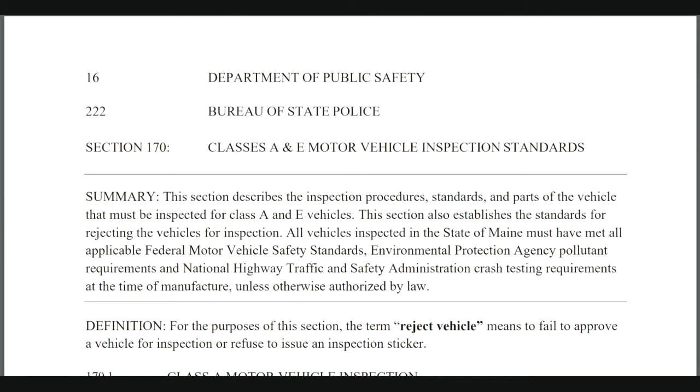Definition: For the purposes of this section, the term reject vehicle means to fail to approve a vehicle for inspection or refuse to issue an inspection sticker.

Class A Motor Vehicle Inspection. 1. Brakes. A. Procedure and Standard. 1. Hydraulic brake system. Depress the brake pedal using moderate foot force. There should be a minimum of approximately 1/3 of the available travel remaining. Moderate force is defined as 40 to 60 pounds in a non-power system and 15 to 20 pounds in a power assist system. Check power assist system with the engine running.

A. Reject vehicle if less than 1/3 of the total available pedal travel remains when the pedal is depressed under moderate foot pressure. B. Reject vehicle if pad is missing from the brake pedal.

2. Service brake and transmission test. Test the vehicle by driving it into the service area. Observe whether the vehicle comes to a smooth stop without pulling to the left or to the right. Test the vehicle's transmission, forward and reverse gears, as well as park position in automatic transmissions to ensure proper working order.

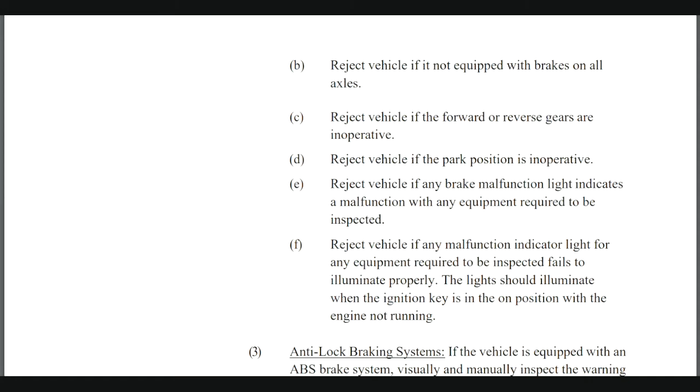3. Anti-lock braking systems. If the vehicle is equipped with an ABS braking system, visually and manually inspect the warning light. A. Reject vehicle if the warning light fails to illuminate during the cycle or self-check, or if the light remains on, or a self-diagnostic error is indicated. B. Reject vehicle if the ABS braking system is disconnected, disabled, or removed.

4. Parking brake performance. Set the parking brake firmly to determine the reserve travel of the hand, lever, or foot pedal. If the vehicle is equipped with a band-type parking brake, inspect the propeller shaft or drive shaft for the presence of oil or grease, and the condition of the lining and tightness.

A. Reject vehicle if the parking brake does not hold the vehicle upon testing. B. Reject vehicle if the method of applying the parking and service brakes are connected and constructed so that failure of one part leaves the vehicle without operative brakes. C. Reject vehicle if there is no reserve travel in the lever or pedal unless designed with no reserve by the manufacturer. D. Reject vehicle if there is oil or grease on the drum or lining.

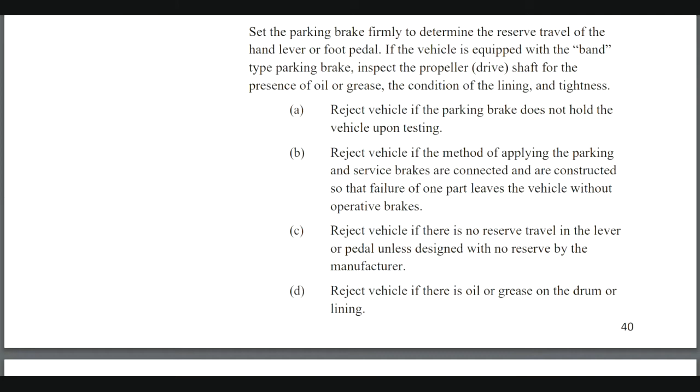E. Reject vehicle if lining is worn through the steel band. F. Reject vehicle if parking brake fails to properly disengage.

B. Inspection of braking mechanisms. 1. Brake linings and disc brake pads. If in the judgment of the inspection technician it is necessary, and with the customer's consent, the technician may remove at least one front wheel and one rear wheel and drum to further examine the brakes. A. Reject vehicle if, on a bonded lining, the thinnest point is less than 2/32 of an inch.

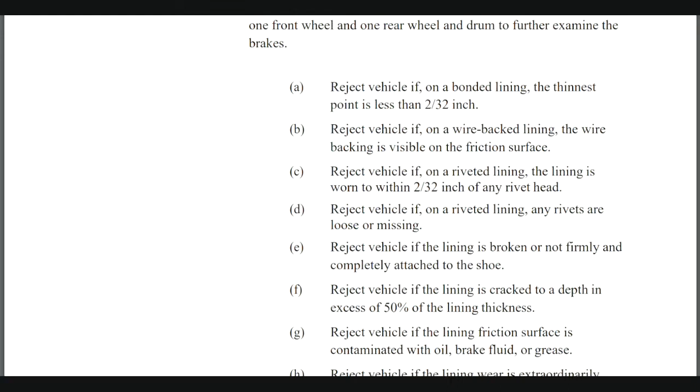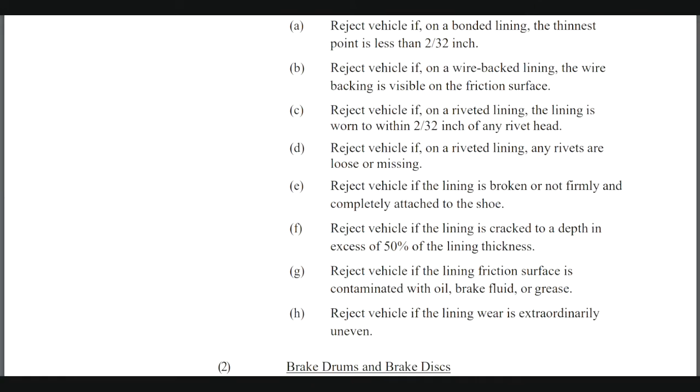Reject vehicle if, on a wire-backed lining, the wire backing is visible on the friction surface. Reject vehicle if, on a riveted lining, the lining is worn to within 2/32 of any rivet head, or if any rivets are loose or missing. Reject vehicle if the lining is broken or not firmly and completely attached to the shoe. Reject vehicle if the lining is cracked to a depth in excess of 50% of the lining's thickness. Reject vehicle if the lining friction surface is contaminated with oil, brake fluid, or grease. Reject vehicle if the lining wear is extraordinarily uneven.

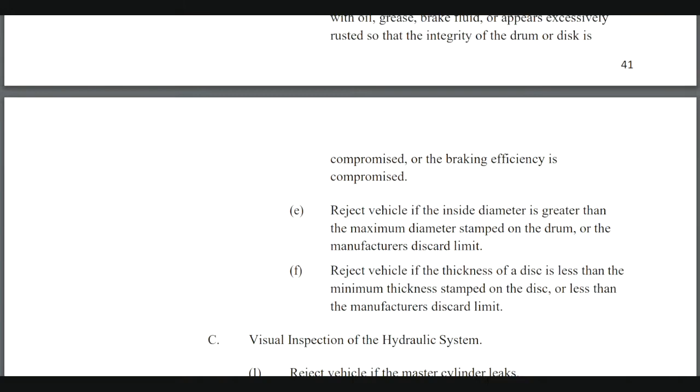Brake drums and brake discs. Reject vehicle if there are substantial cracks on the friction surface extending to the open edge, or if there are external cracks. Reject vehicle if there is evidence of mechanical damage other than wear. Reject vehicle if the friction surface is contaminated with oil, grease, brake fluid, or appears excessively rusted so that the integrity of the drum or disc is compromised or the braking efficiency is compromised. Reject vehicle if the inside diameter is greater than the maximum diameter stamped on the drum or the manufacturer's discard limit. Reject vehicle if the thickness of the disc is less than the minimum thickness stamped on the disc, or less than the manufacturer's discard limit.

Visual inspection of the hydraulic system. Reject vehicle if the master cylinder leaks, has pressure fade, or is less than half full or below the manufacturer's specifications. Reject vehicle if the gasket is torn or missing. Reject vehicle if the wheel cylinders leak. Reject vehicle if the hoses or tubings leak or are cracked, chafed, flattened, restricted, or are insecurely fastened. Reject vehicle if the brake tubing is rusted to a point of flaking, is bulging, pitting, or has welded sections. Surface rust is not a cause for rejection.

Reject vehicle if any replacement hydraulic brake lines are made with material other than automotive-rated tubing that meets SAE standards, or if the safety tubing is not joined with an SAE-approved hydraulic brake line fitting to ensure a leak-proof joint. Currently, there are no SAE-approved compression fittings for hydraulic brake lines.

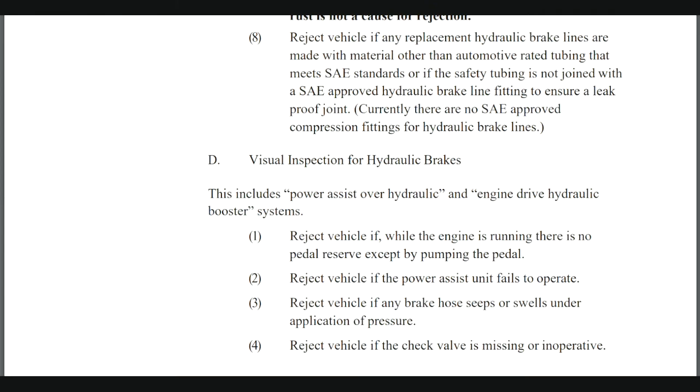Visual inspection for hydraulic brakes. This includes power assist over hydraulic and engine-drive hydraulic booster systems. Reject vehicle if, while the engine is running, there is no pedal reserve except by pumping the pedal. Reject vehicle if the power assist unit fails to operate. Reject vehicle if any brake hose seeps or swells under application of pressure. Reject vehicle if the check valve is missing or inoperative. Reject vehicle if there is any visually observed leaking hydraulic fluid in the brake system.

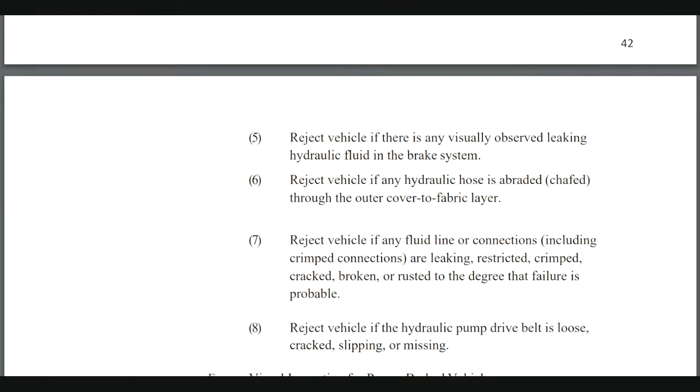Reject vehicle if any hydraulic hose is abraded, chafed, through the outer cover to fabric layer. Reject vehicle if any fluid line or connections, including crimped connections, are leaking, restricted, crimped, cracked, broken, or rusted to the degree that failure is probable. Reject vehicle if the hydraulic pump drive belt is loose, cracked, slipping, or missing.

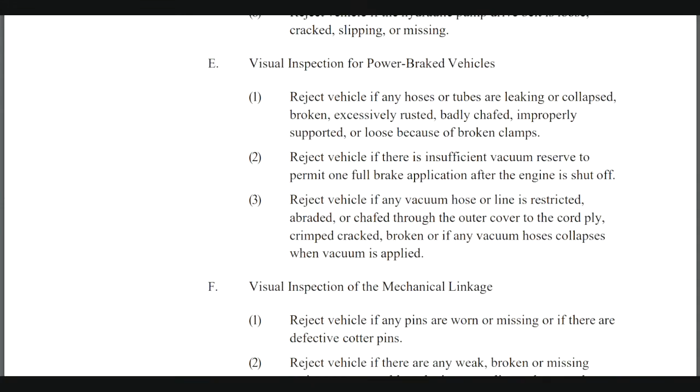Visual inspection for power braked vehicles. Reject vehicle if any hoses or tubes are leaking or collapsed, broken, excessively rusted, badly chafed, improperly supported, or loose because of broken clamps. Reject a vehicle if there is insufficient vacuum reserve to permit one full brake application after the engine is shut off. Reject a vehicle if any vacuum hose or line is restricted, abraded, or chafed through the outer cover to the cord ply, crimped, cracked, broken, or if any vacuum hoses collapse when vacuum is applied.

Visual inspection of the mechanical linkage. Reject vehicle if any pins are worn or missing, or if there are defective cotter pins. Reject vehicle if there is any weak, broken, or missing springs, or worn cables, clevises, coupling rods, or anchor pins. Reject vehicle if there are any frozen, rusted, or inoperative connections. Reject vehicle if the pedal shaft or any bearings are worn from high friction or are misaligned.

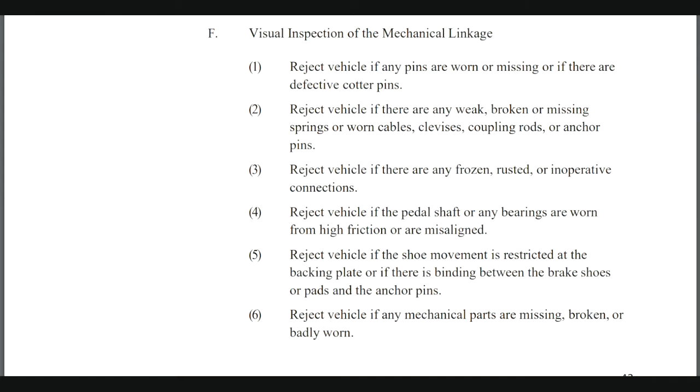Reject vehicle if the shoe movement is restricted at the backing plate or if there is binding between the brake shoes or pads and the anchor pins. Reject vehicle if any mechanical parts are missing, broken, or badly worn. Reject vehicle if there is high friction in pedal and linkage or in brake components. Reject vehicle if any brake operating levers are improperly positioned or misaligned. Reject vehicle if the brake pads are binding on the caliper brackets or if the brake slides are frozen.

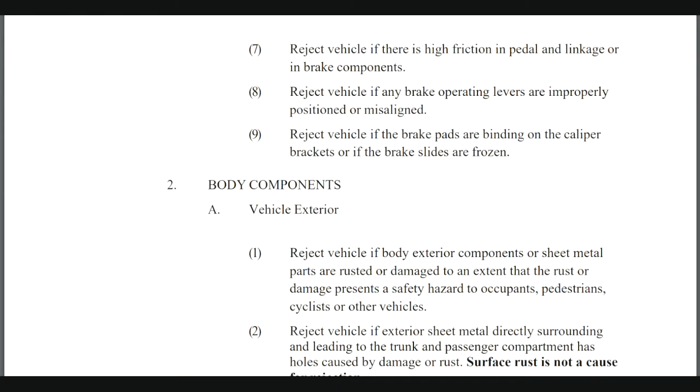Body components. Vehicle exterior. Reject vehicle if body exterior components or sheet metal parts are rusted or damaged to an extent that the rust or damage presents a safety hazard to occupants, pedestrians, cyclists, or other vehicles.

Reject vehicle if exterior sheet metal directly surrounding and leading to the trunk and passenger compartment has holes caused by damage or rust. Surface rust is not a cause for rejection. Reject vehicle if any required body exterior components, including the hood, fenders, quarter panels, doors, and side panels, are loose, missing, or not securely attached to the body as a result of damage, modification, or rust.

Reject vehicle if any door is missing, unless originally manufactured with removable doors, has inoperable latches, broken or missing parts, or otherwise fails to function properly. Rear door latches can be disabled on a police cruiser. A vehicle may have the door handles removed and the sheet metal and door opening mechanism modified to create a smooth appearance. There must, however, be a mechanical method of opening any door from inside the vehicle.

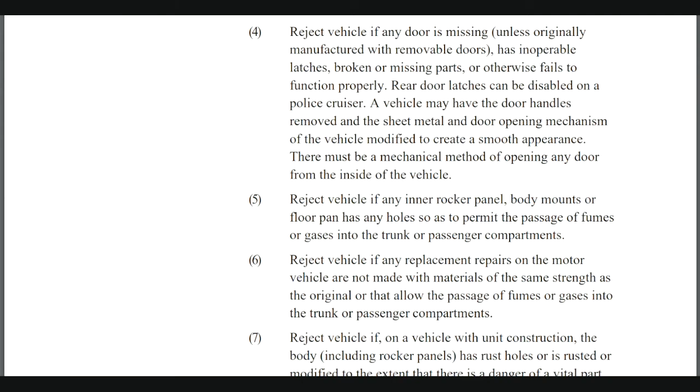Reject vehicle if any inner rocker panel, body mounts, or floor pan has any holes as to permit the passage of fumes or gases into the trunk or passenger compartments. Reject vehicle if any replacement repairs on the motor vehicle are not made with materials of the same strength as the original, or that allow passage of fumes or gases into the trunk or passenger compartments.

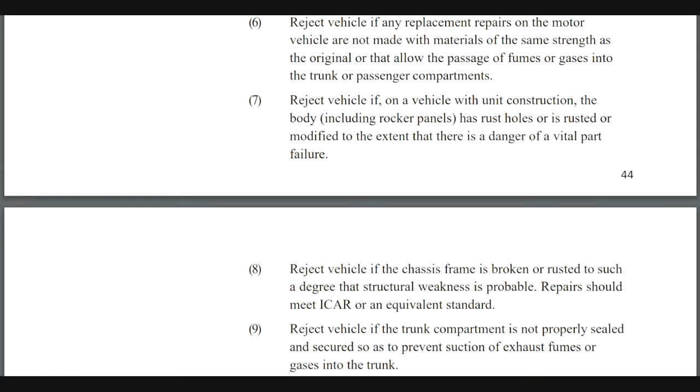Reject vehicle if on a vehicle with unit construction the body, including rocker panels, have rust holes or is rusted or modified to the extent that there is danger of a vital part failure. Reject vehicle if the chassis frame is broken or rusted to such a degree that structural weakness is probable. Repairs should meet ICAR or equivalent standard.

Reject vehicle if the trunk compartment is not properly sealed and secured so as to prevent suction of exhaust fumes or gases into the trunk. Reject vehicle if the hood latch mechanism fails to operate properly unless it is otherwise secured so it will not open accidentally. Section B: Fenders and bumper protection systems.

Reject vehicle if on a vehicle originally equipped with bumpers, any bumpers are missing or are not securely attached. Reject vehicle if any modification to or replacement of the vehicle's originally equipped bumper protection system is not of the same apparent strength or results in less protection. A bumper protection system may consist of structural and or cosmetic components, sheet metal or other material, designed to limit damage in a frontal or rear impact.

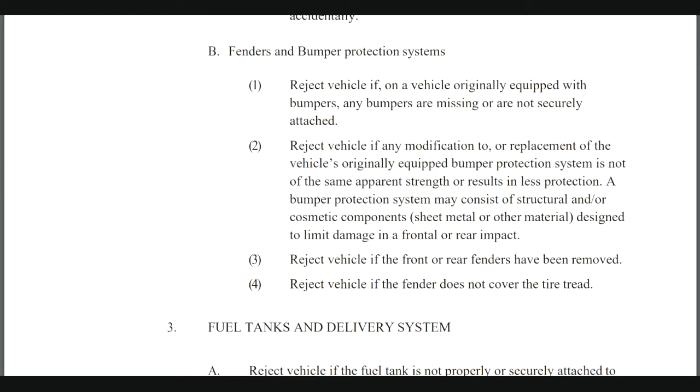Reject vehicle if the front or rear fenders have been removed. Reject vehicle if the fender does not cover the tire tread.

Section 3: Fuel tanks and delivery system. A: Reject vehicle if the fuel tank is not properly or securely attached to the vehicle body or chassis. B: Reject vehicle if the fuel cap is missing or broken. C: Reject vehicle if any fuel evaporation hose is broken or not connected. D: Reject vehicle if the fuel tank was not of a type originally manufactured for motor vehicles.

Aftermarket auxiliary fuel tanks and fuel cells are acceptable as long as they meet all other requirements of this section and any applicable federal or state law. E: Reject vehicle if there is any fuel or gas leak anywhere in the fuel delivery system. F: Reject vehicle if the fuel line is rusted to the point of flaking, bulging, or pitting, and failure is imminent.

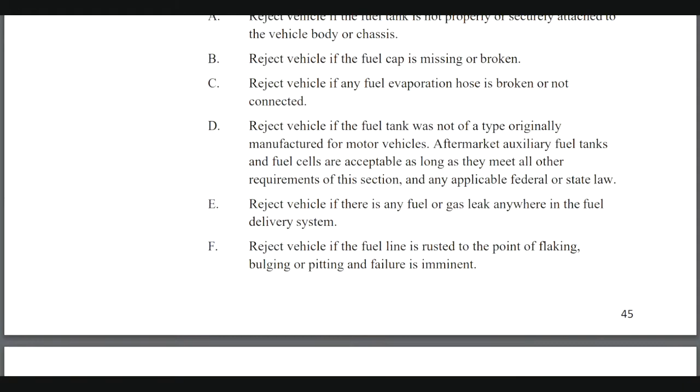G: Reject vehicle if the fuel tank or fuel tank filler vent or drain openings are not located outside the passenger or trunk areas. H: Reject vehicle if any replacement fuel lines are made with material other than automotive-rated tubing or braided hose for fuel line use. Note: fuel and evaporative lines may be repaired with SAE-approved compression fittings.

Section 4: Seats and passenger restraint systems. A: Reject vehicle if any seat is not properly and securely attached to the floor. B: Reject vehicle if any seat adjusting mechanism slips out of the set position or fails to function properly. C: Reject vehicle if any replacement seat was not originally designed for motor vehicles.

D: Reject vehicle if seat belts are not installed on 1966 and subsequent models, and retractable seat belts are not installed and functioning in 1980 and subsequent models. E: Reject vehicle if any seat belts are not completely functional or if they have cuts or excessive fraying.

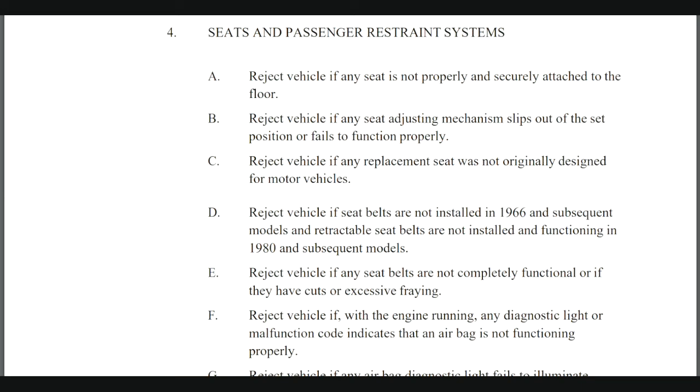F: Reject vehicle if, with the engine running, any diagnostic light or malfunction code indicates that an airbag is not functioning properly. G: Reject vehicle if any airbag diagnostic light fails to illuminate during the self-check. H: Reject vehicle if any deployed airbag has not been properly replaced with a functioning airbag system.

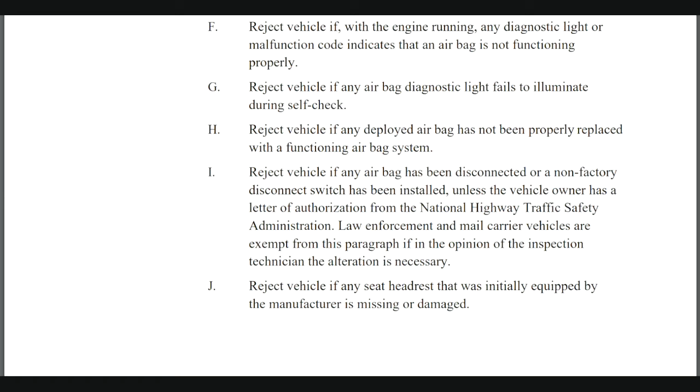I: Reject vehicle if any airbag has been disconnected or a non-factory disconnect switch has been installed, unless the vehicle owner has a letter of authorization from the National Highway Traffic Safety Administration. Law enforcement and mail carrier vehicles are exempt from this paragraph if, in the opinion of the inspection technician, the alteration was necessary. J: Reject vehicle if any seat headrest that was initially equipped by the manufacturer is missing or damaged.

5. Other vehicle components. A. Reject vehicle if automotive batteries are installed in the passenger compartment other than those originally installed by the manufacturer. B. Reject vehicle if the battery is not secured by a hold down. C. Reject vehicle if the battery tray is rusted to the point where it no longer securely supports the battery.

D. Reject vehicle if automotive batteries originally installed by the manufacturer in the passenger compartment are not secured and equipped with a protective covering to prevent injury to or contact with any person.

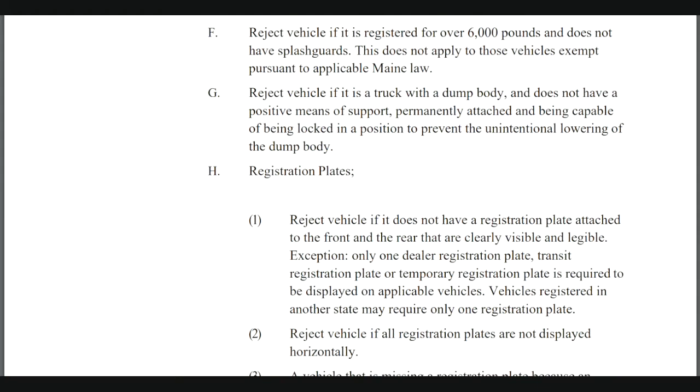E. Reject vehicle if it leaks petroleum fluids in an amount or in such a location as to constitute a fire hazard. F. Reject vehicle if it is registered for over 6,000 pounds and does not have splash guards. This does not apply to those vehicles exempt pursuant to applicable Maine law.

Reject vehicle if it is a truck with a dump body and does not have a positive means of support permanently attached and being capable of being locked in a position to prevent the unintentional lowering of the dump body.

H. Registration plates. 1. Reject vehicle if it does not have a registration plate attached to the front and the rear that are clearly visible and legible. Exception: only one dealer registration plate, transit registration plate, or temporary registration plate is required to be displayed on applicable vehicles. Vehicles registered in another state may require only one registration plate.

2. Reject vehicle if all registration plates are not displayed horizontally. 3. A vehicle that is missing a registration plate because an original was lost, mutilated, or illegible may be inspected if it has a temporary registration plate bearing the registration number that is displayed as nearly as possible in the position occupied by the original plate, and if the owner has a receipt from the Bureau of Motor Vehicles showing that a replacement registration plate has been ordered.

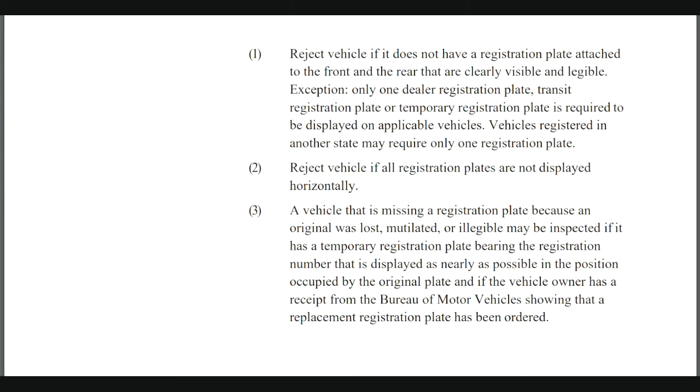6. Exhaust system. A. Exhaust system examination. 1. The exhaust system includes the exhaust manifolds, head pipes, catalytic converters, intermediate pipes, mufflers, and tailpipes.

2. The exhaust system shall be examined by listening for exhaust leaks and shall be examined visually after either the vehicle has been lifted on a hoist or has been jacked up sufficiently to allow a proper examination, or is over a pit. Rusted or corroded areas must be examined carefully.

B. Rejection standards. 1. Reject vehicle if there is any loose or leaking joints or seams in the exhaust system. 2. Reject vehicle if there are any holes in the exhaust system other than small holes obviously made by the manufacturer to provide drainage.

3. Reject vehicle if there are any loose interior baffles. 4. Reject vehicle if the exhaust system has been inadequately repaired. 5. Reject vehicle if any exhaust system elements are not fastened securely by use of hangers or clamps.

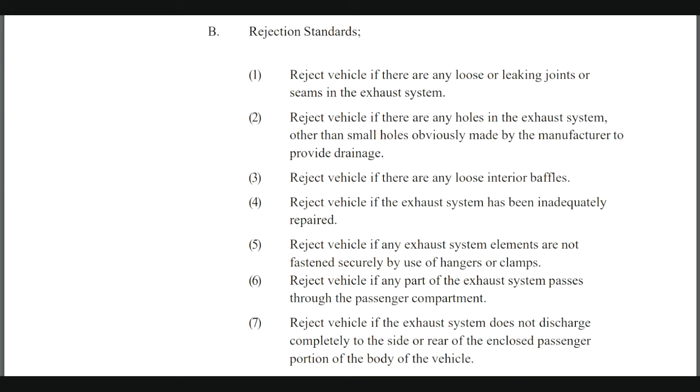6. Reject vehicle if any part of the exhaust system passes through the passenger compartment. 7. Reject vehicle if the exhaust system does not discharge completely to the side or rear of the enclosed passenger portion of the body of the vehicle.

8. Reject vehicle if it is not equipped with a muffler or mufflers that are effective at reducing noise. No muffler may be altered to amplify noise, and all mufflers must prevent excessive or unusual noise.

9. Reject vehicle if it was manufactured after the 1982 model year and it is not equipped with a catalytic converter, unless the vehicle was not originally equipped with a catalytic converter. Note: if the vehicle was originally equipped with a catalytic converter, it must have one to pass inspection, even if the vehicle was manufactured in 1982 or prior years.

10. Reject vehicle if the tailpipe extends more than 2 inches beyond the rearmost point of the vehicle or bumper, unless originally so equipped by the manufacturer. Note: Maine standards for new aftermarket catalytic converters, AMCC, began June 1st, 2018. See supplemental info.

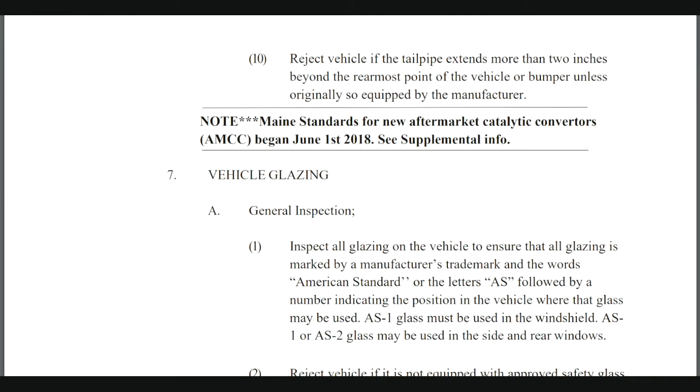7. Vehicle glazing. A. General inspection. 1. Inspect all glazing on the vehicle to ensure that all glazing is marked by a manufacturer's trademark and the words American Standard or the letters AS, followed by a number indicating the position in the vehicle where that glass may be used.

AS1 glass must be used in the windshield. AS1 or AS2 glass may be used in the side and rear windows. 2. Reject the vehicle if it is not equipped with approved safety glass, wherever glass is used in doors, windows, and windshields, if the vehicle was manufactured after December 31st, 1937.

3. Reject vehicle if cloudiness extends more than 1 inch from the top or sides or more than 4 inches from the bottom edge of the windshield and, in the opinion of the inspecting technician, obstructs the driver's clear view of the road.

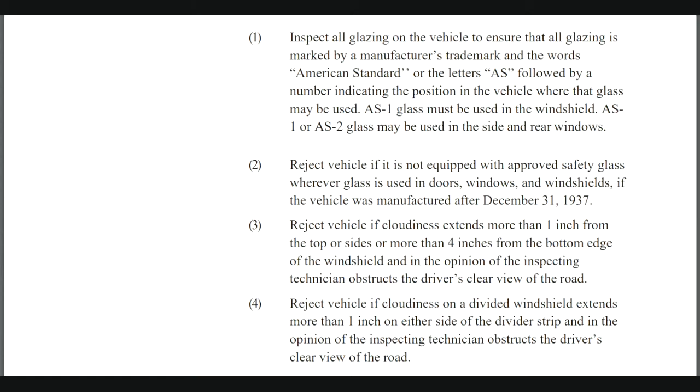4. Reject vehicle if cloudiness on a divided windshield extends more than 1 inch on either side of the divider strip, and in the opinion of the inspecting technician obstructs the driver's clear view of the road.

5. Reject vehicle if in the critical vision area of the windshield there are any unrepaired bullseye fractures, star fractures, stone bruises, cracks, or chips that measure more than 1 inch at the extreme edges, and, in the opinion of the inspecting technician, obstructs the driver's clear view of the road.

6. Reject vehicle if there is any crack more than 6 inches long within the critical vision area of the windshield. 7. Reject vehicle if there is a windshield wiper scratch, mar, or marks more than 4 inches long and 1/4 inch wide on the windshield,

and in the opinion of the inspecting technician, obstructs the driver's clear view of the road. 8. Reject vehicle if it was originally equipped with a windshield by the manufacturer and it does not have a windshield.

9. Reject vehicle if either the left or right front window mechanism is not in working order. 10. Reject vehicle if any glass is broken or shattered so as to obstruct the vision of the operator or endanger the occupants of the vehicle.

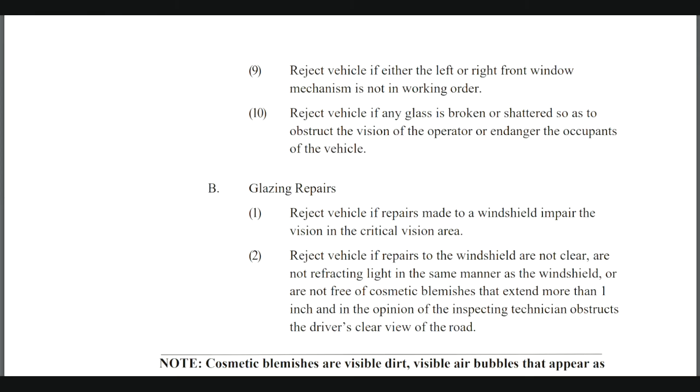B. Glazing repairs. 1. Reject vehicle if repairs made to a windshield impair the vision in the critical vision area. 2. Reject vehicle if repairs to the windshield are not refracting light in the same manner as the windshield, or are not free of cosmetic blemishes that extend more than 1 inch, and, in the opinion of the inspecting technician, obstructs the driver's clear view of the road.

Note: cosmetic blemishes are visible dirt, visible air bubbles that appear as silver or black spots, visible cracks with a discernible thickness that appear as black or silver lines, or cloudiness of the laminate.

C. Window tinting, treatments, or coverings. 1. Reject vehicle if there are any items other than items allowed by statute hanging on or in the windshield, front side windows, or rear window that obstruct or obscure the driver's view.

2. Reject vehicle if any window is composed of, covered with, or treated with any reflective material. 3. Reject vehicle if the windshield has any tint that is not part of a factory-installed original equipment windshield, installed in accordance with FMVSS, Section 205. A tinted sunshield strip that extends no more than 5 inches from the top of the windshield is permissible.

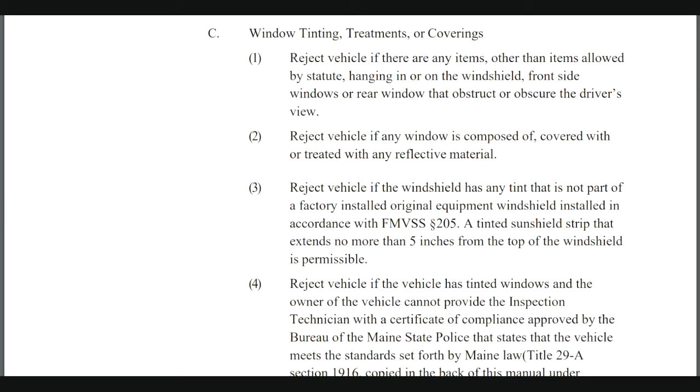4. If the vehicle has tinted windows and the owner of the vehicle cannot provide the inspection technician with a certificate of compliance approved by the Bureau of the Maine State Police that states that a vehicle meets the standards set forth by Maine law, Title 29-A, Section 1916, copied in the back of this manual under supplemental info, in this chapter for light transmittance.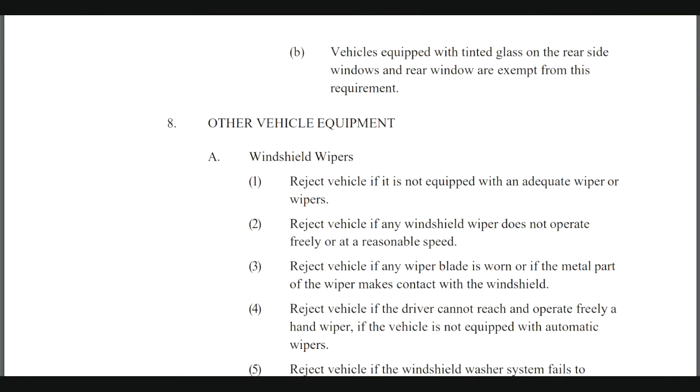A. Any window tinting treatment or covering must be removed if it fails to meet the inspection standard. B. Vehicles equipped with tinted glass on the rear side windows and rear window are exempt from this requirement.

8. Other vehicle equipment. A. Windshield wipers. 1. Reject vehicle if it is not equipped with an adequate wiper or wipers. 2. Reject vehicle if any windshield wiper does not operate freely or at a reasonable speed. 3. Reject vehicle if any wiper blade is worn or if the metal part of the wiper makes contact with the windshield.

4. Reject vehicle if the driver cannot reach and freely operate a hand wiper if the vehicle is not equipped with automatic wipers. 5. Reject vehicle if the windshield washer system fails to function as designed.

B. Rear view mirrors. 1. Reject vehicle if it does not have all the original factory installed rear view mirrors or their equivalent replacement. A vehicle with a dump body or similar obstruction, like an ambulance, cube van, etc., is not required to have an inside rear view mirror.

2. Reject vehicle if any mirror is not mounted securely to prevent its swinging or excessive vibration. 3. Reject vehicle if any mirror does not give the driver a view of the road 200 feet to the rear.

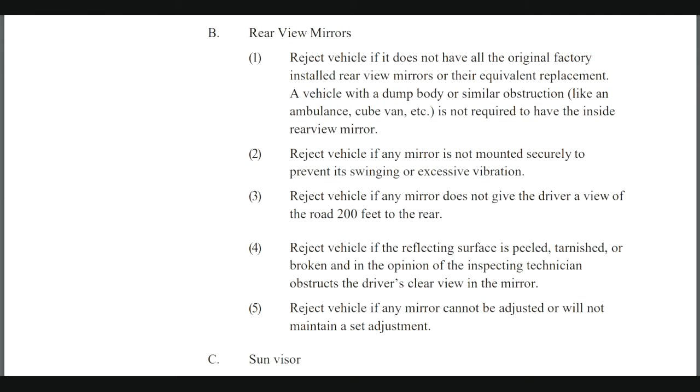Reject vehicle if the reflecting surface is peeled, tarnished, or broken and, in the opinion of the inspecting technician, obstructs the driver's clear view in the mirror. Reject vehicle if any mirror cannot be adjusted or will not maintain a set adjustment.

Sun visor: Reject vehicle if the sun visor cannot maintain a fixed position, if the vehicle is equipped with a sun visor.

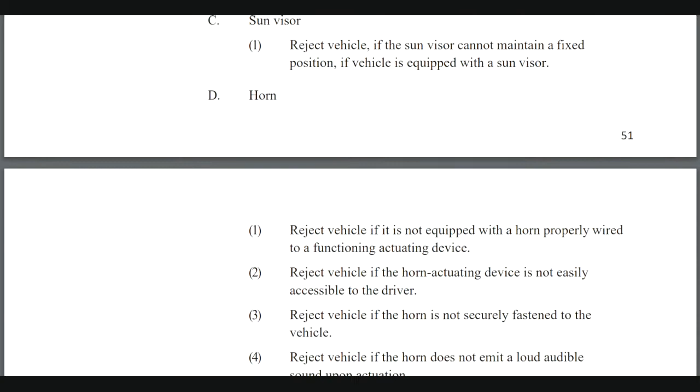Horn: Reject vehicle if it is not equipped with a horn properly wired to a functioning actuating device. Reject vehicle if the horn actuating device is not easily accessible to the driver. Reject vehicle if the horn is not securely fastened to the vehicle. Reject vehicle if the horn does not emit a loud, audible sound upon actuation.

Lights and electrical. General lamp inspection includes inspection of reflex reflectors and of the following types of lamps: head, tail, stop, license, clearance, signal, marker, side marker, and fog/driving lights.

Any required original equipment light or its equivalent replacement must be present and functioning. Any aftermarket lamps, including headlamps, must be DOT approved for highway use. Any auxiliary lights not prohibited by law or regulation that are added to the vehicle or installed as optional equipment by the manufacturer are not required to function. Example: fog lights, lights on an off-road roll bar, etc.

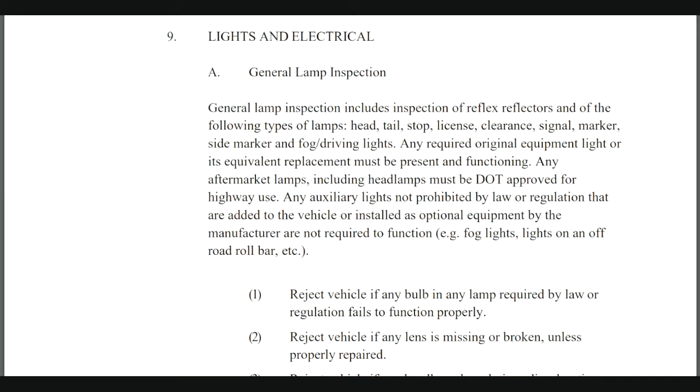Reject vehicle if any bulb in any lamp required by law or regulation fails to function properly. Reject vehicle if any lens is missing or broken, unless properly repaired. Reject vehicle if any headlamp has obvious discoloration, contamination, or reflector deterioration that reduces the lighting below safe operating levels. Reject vehicle if any lamp is not securely fastened to the vehicle.

Reject vehicle if any lamp shows a beam of color, is installed, or functioned in a manner contrary to law. Reject vehicle if any lens or lamp required by law or regulation is covered by any device or material that reduces the amount of light transmitted or reduces the area of illumination of a lens or lamp by any amount. This includes, but is not limited to, devices such as tinted films, baskets, louvers, and mesh covers that reduce the amount of light transmittance.

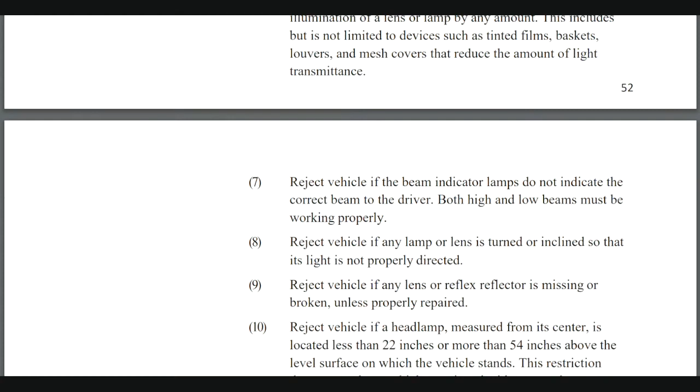Reject vehicle if the beam indicator lamps do not indicate the correct beam to the driver. Both high and low beams must be working properly. Reject vehicle if any lamp or lens is turned or inclined so that its light is not properly directed. Reject vehicle if any lens or reflex reflector is missing or broken unless it has been properly repaired.

Reject vehicle if a headlamp measured from its center is located less than 22 inches or more than 54 inches above the level surface on which the vehicle stands. This restriction does not apply to vehicles equipped with a snowplow.

Reject vehicle if the backup lights fail to function when the vehicle is placed in reverse gear. Reject vehicle if the backup lights remain on when the vehicle is in any gear other than reverse. Reject vehicle if it is equipped with LED lighting and 50% or more of the LEDs are not functioning.

Note: properly repaired means that the repair is made with a clear material or a material that is the same color of the lens and prevents moisture from entering the inside of the lens and that maintains the integrity of the unit. Tape is not considered an acceptable repair material.

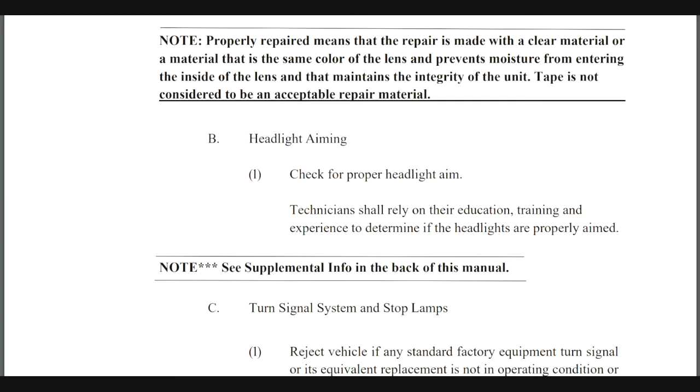Turn signal system and stop lamps: Reject vehicle if any standard factory equipment turn signal, or its equivalent replacement, is not in operating condition or does not function properly. Reject vehicle if the lens is not clear, white, or amber to the front, or clear, red, or amber in the rear.

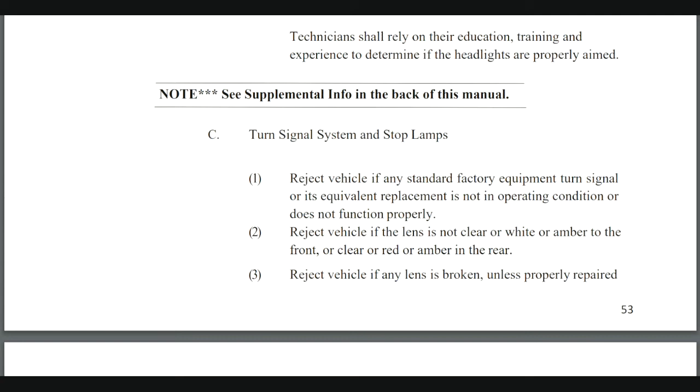Reject vehicle if any lens is broken unless properly repaired. Reject vehicle if any lamp housing is not securely fastened. Reject vehicle if any signal does not operate properly with each throw of the switch. Reject vehicle if any stop lamp does not operate properly with slight pressure on the brake pedal. Reject vehicle if any stop lamp does not emit a steady or pulsating red light.

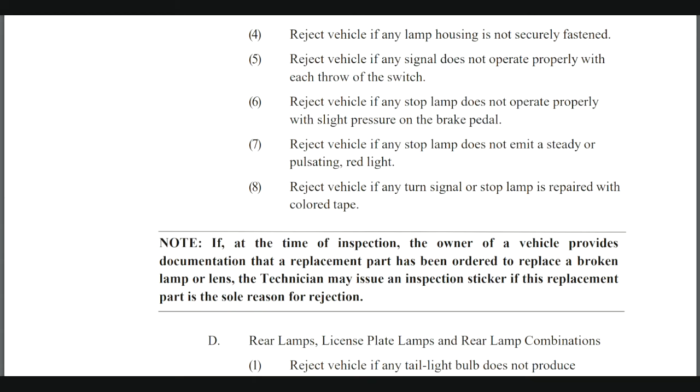Reject vehicle if any turn signal or stop lamp is repaired with colored tape. Note: if at the time of inspection the owner of a vehicle provides documentation that a replacement part has been ordered to replace a broken lamp or lens, the technician may issue an inspection sticker if this replacement part is the sole reason for rejection.

D. Rear lamps, license plate lamps, and rear lamp combinations. Reject vehicle if any taillight bulb does not produce sufficient light so as to be visible from a distance of 100 feet to the rear. Reject vehicle if all taillights do not produce a red light. Reject vehicle if any taillight is broken, unless properly repaired, missing, or discolored. Reject vehicle if any turn signal or stop lamp is repaired with colored tape.

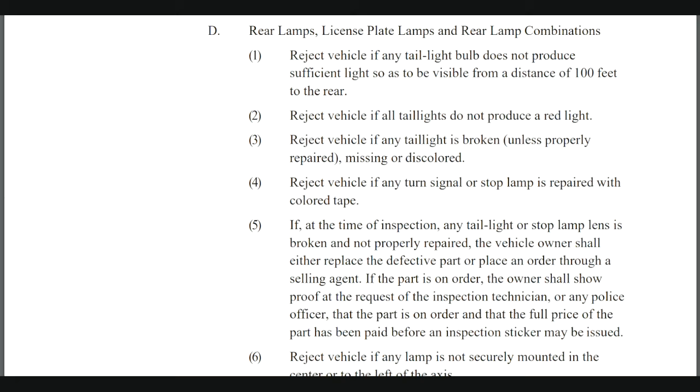If, at the time of inspection, any taillight or stop lamp lens is broken and not properly repaired, the vehicle owner shall either replace the defective part or place an order through a selling agent. If the part is on order, the owner shall show proof at the request of the inspection technician or any police officer that the part is on order and the full price of the part has been paid before an inspection sticker may be issued.

Reject vehicle if any lamp is not securely mounted in the center or to the left of the axis. Reject vehicle if any taillight does not produce a steady light to the rear. Reject vehicle if any lamp housing is not securely fastened. Reject vehicle if the tail and rear plate lights do not operate properly in all switch positions.

Reject vehicle if the license plate light bulbs do not produce a sufficient steady white light to illuminate the entire rear license plate so as to be visible from a distance of 50 feet or more to the rear of the vehicle. Reject vehicle if any aftermarket lighting device is installed around or near the license plate and such a device is of a color or function contrary to law.

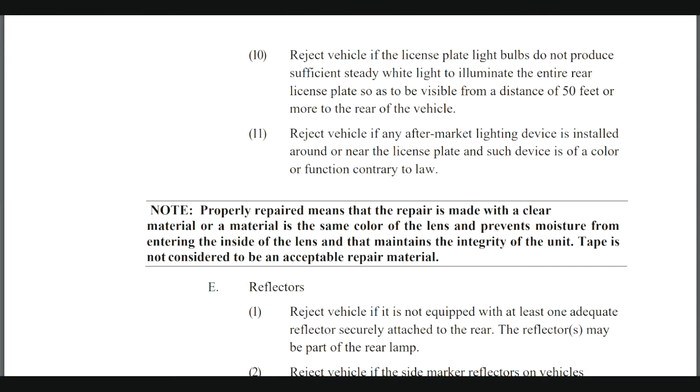Note: properly repaired means that the repair is made with a clear material or material is the same color of the lens and prevents moisture from entering the inside of the lens, and that maintains the integrity of the unit. Tape is not considered an acceptable repair material.

E. Reflectors. Reject vehicle if it is not equipped with at least one adequate reflector securely attached to the rear. The reflectors may be part of the rear lamp. Reject vehicle if the side marker reflectors on vehicles originally so equipped are missing.

Reject vehicle if any reflector does not have a red lens. Reject vehicle if any lens is broken and not properly repaired. Reject vehicle if the reflectors are not adequate to reflect the high-beamed headlight of a vehicle approaching from the rear and being driven at night on an unlit highway from a distance of 200 feet.

F. Optional auxiliary lighting and under-vehicle lighting. A vehicle may only be equipped with or display an auxiliary light if it conforms to the requirements of this section. Reject vehicle if any auxiliary light is not white or amber on the front of the vehicle. Reject vehicle if any auxiliary light is not amber on the side of the vehicle. Reject vehicle if any auxiliary light is not amber or red to the rear of the vehicle.

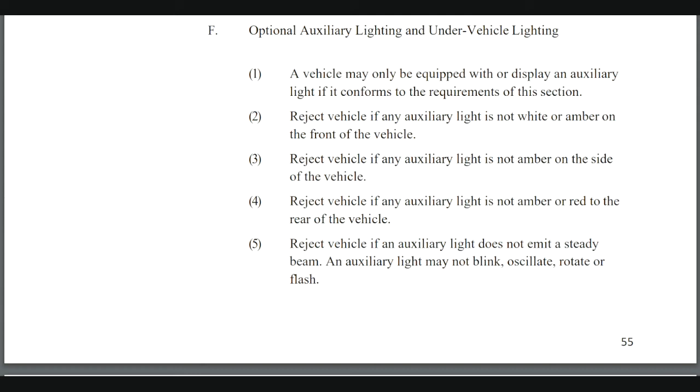Reject vehicle if an auxiliary light does not emit a steady beam. An auxiliary light may not blink, oscillate, rotate, or flash. Reject vehicle if any auxiliary light emits a beam that is brighter than, has greater candle power than, or distracts from the visibility of standard lighting equipment.

Reject vehicle if any auxiliary light is installed in a manner or on the vehicle so that it distracts or impairs the vision of the driver. Reject vehicle if any blue interior auxiliary lighting or dash lighting is visible at a height of 42 inches or more above a surface parallel with a level surface on which the vehicle stands, at a distance of 20 feet from any part of the vehicle.

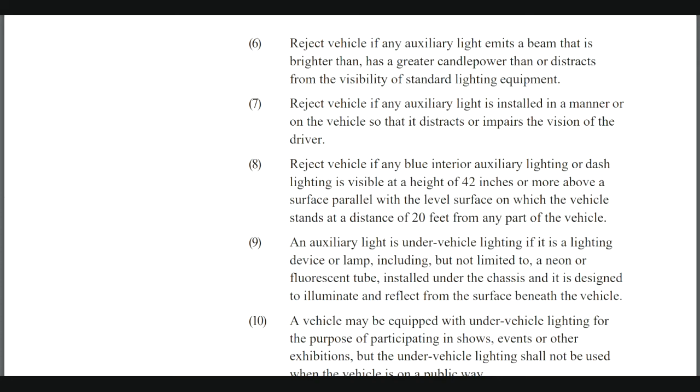An auxiliary light is under vehicle lighting if it is a lighting device or lamp including, but not limited to, a neon or fluorescent tube installed under the chassis and is designed to illuminate and reflect from the surface beneath the vehicle. A vehicle may be equipped with under-vehicle lighting for the purpose of participating in shows, events, or other exhibitions, but the under-vehicle lighting shall not be used when the vehicle is on a public way.

G. Speedometer. Reject vehicle if speedometer fails to operate.

Steering alignment and suspension.

Testing methods. All items listed under the definitions of steering linkage and suspension systems shall be examined and tested as applicable. When specific technical measurements or tolerances are not listed in the inspection manual, the inspection technician shall refer to and follow the manufacturer's technical guides or service manuals for the vehicle being inspected.

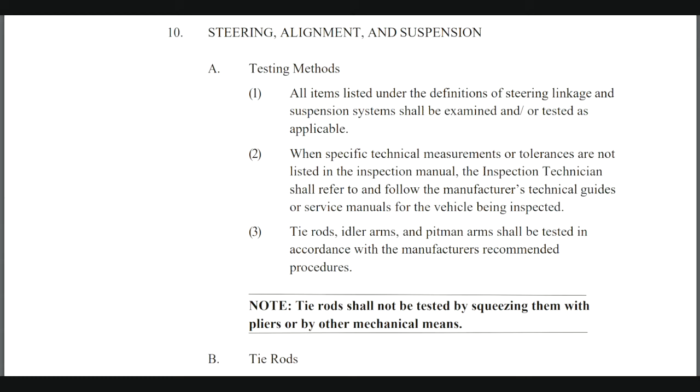Tie rods, idler arms, and pitman arms shall be tested in accordance with the manufacturer's recommended procedures. Note: tie rods shall not be tested by squeezing them with pliers or by other mechanical means.

Tie rods. Reject vehicle if there is any looseness or play in the tie rod end, unless within the manufacturer's tolerance. Reject vehicle if the tie rod adjusting sleeve is bent, cracked, or stripped.

Reject vehicle if the tie rod ends bind or do not rotate normally through the proper range. Reject vehicle if the movement of any steering component is in excess of the manufacturer's specifications.

Steering lash. Reject vehicle if the power steering fluid is leaking from the rack and pinion. Seepage is not a cause for rejection.

Reject vehicle if any binding in the steering linkage is detected. Reject vehicle if the total movement is greater than the manufacturer's specifications. Reject vehicle if electric and or hydraulic power steering pump or assist motor fails to operate correctly.

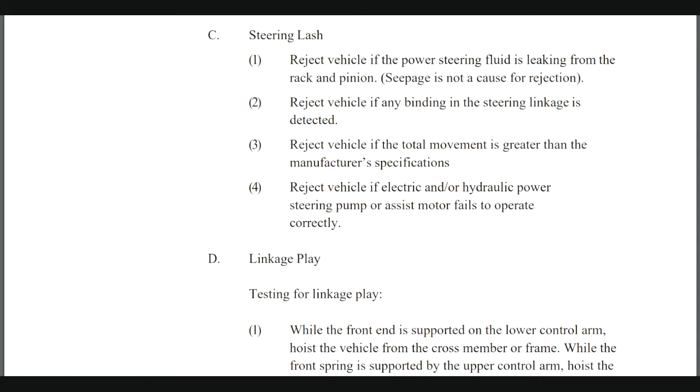Linkage play. Testing for linkage play. While the front end is supported on the lower control arm, hoist the vehicle from the cross member or frame while the front spring is supported by the upper control arm. Hoist the vehicle at the lower control arm.

With the front end lifted properly and the wheels in the straight ahead position, grasp the front and rear of the front tire and attempt to turn the assembly right and left. Record the movement of the extreme front or rear of the tire. Note: do not jerk the wheel. Please follow manufacturer's recommendations for testing.

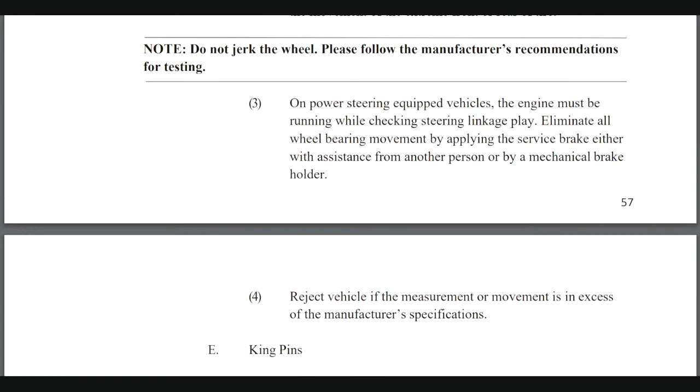On power steering equipped vehicles, the engine must be running while checking for steering linkage play. Eliminate all wheel bearing movement by applying the service brake either with assistance from another person or by a mechanical brake holder. Reject vehicle if the measurement or movement is in excess of the manufacturer's specifications.

Kingpins. Testing. With the front end lifted from the axle, measure the movements at the top or bottom of the tire at the outer circumference. Eliminate all wheel-bearing movement by applying the service brake, either with assistance from another person or with a mechanical brake holder. Reject vehicle if the measured movement at the top or bottom of the tire is greater than the manufacturer's specifications.

Ball joints. Inspection of ball joints shall be performed in accordance with the manufacturer's recommended procedures. Testing. Reject vehicle if the movement of the load-carrying and or non-load-carrying ball joints exceed the manufacturer's specifications. Reject vehicle if the fitting boss is flush or inside the cover surface. Reject if the ball joint is severely rusted.

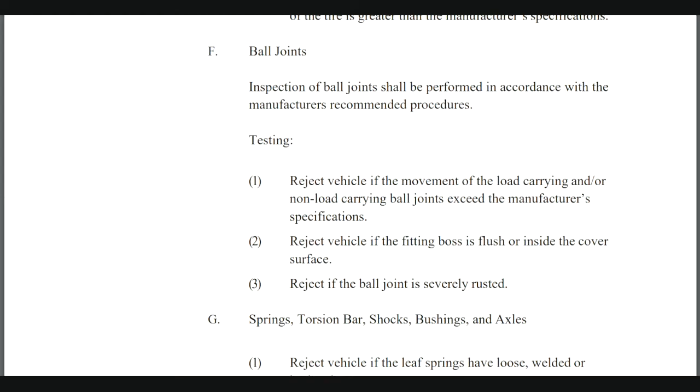Springs, torsion bar, shocks, bushings, and axles. Reject vehicle if the leaf springs have loose, welded, or broken leaves. Reject vehicle if coil springs or spring perches are broken or not securely mounted. Reject vehicle if coil springs are welded.

Reject vehicle if there are loose, missing, broken, severely rusted or worn coils, springs, spring shackles, spring perches, hangers, U-bolts, or spring clips. Reject vehicle if the stabilizer bar, caster struts, or trailing arms are loose, bent, broken, or severely rusted.

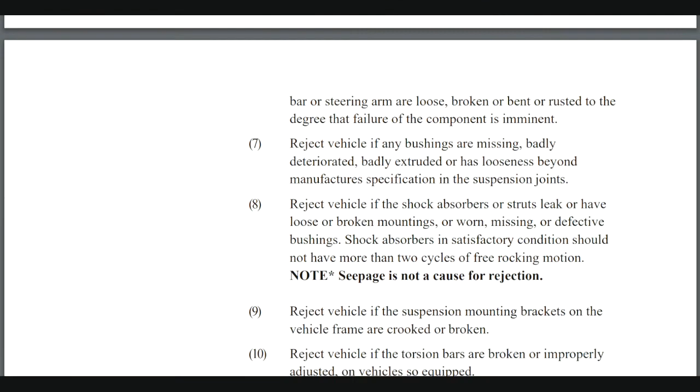Reject vehicle if the control arms, radius arms, equalizer beam assemblies, torque rods, struts, track bar, or steering arm are loose, broken, or bent, or rusted to the degree that failure of the component is imminent.

Reject vehicle if any bushings are missing, badly deteriorated, badly extruded, or has looseness beyond manufacturer's specification in the suspension joints.

Reject vehicle if the shock absorbers or struts leak or have loose or broken mountings, or worn, missing, or defective bushings. Shock absorbers in satisfactory condition should not have more than 2 cycles of free rocking motion. Note: seepage is not a cause for rejection.

Reject vehicle if the suspension mounting brackets on the vehicle frame are crooked or broken. Reject vehicle if the torsion bars are broken or improperly adjusted on vehicles so equipped.

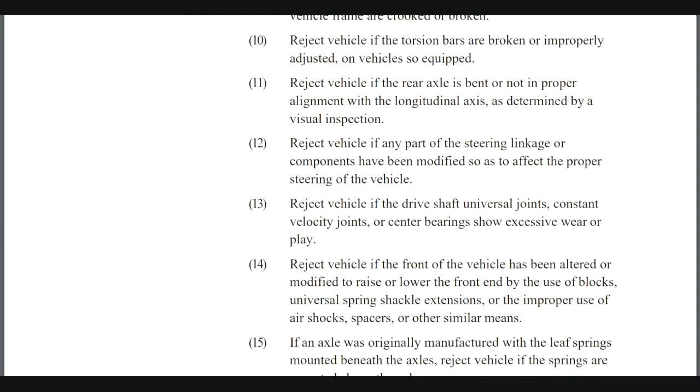Reject vehicle if the rear axle is bent or not in proper alignment with the longitudinal axis as determined by visual inspection. Reject vehicle if any part of the steering linkage or components have been modified so as to affect the proper steering of the vehicle.

13. Reject vehicle if the driveshaft universal joints, constant velocity joints, or center bearings show excessive wear or play. 14. Reject vehicle if the front of the vehicle has been altered or modified to raise or lower the front end by use of blocks, universal spring shackle extensions, or the improper use of air shocks, spacers, or other similar means.

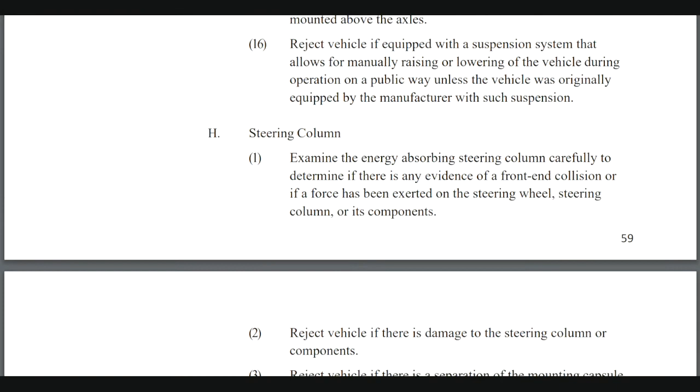15. If an axle was originally manufactured with the leaf springs mounted beneath the axles, reject the vehicle if the springs are mounted above the axles. 16. Reject vehicle if equipped with a suspension system that allows for manually raising or lowering the vehicle during operation on a public way, unless the vehicle was originally equipped by the manufacturer with such suspension.

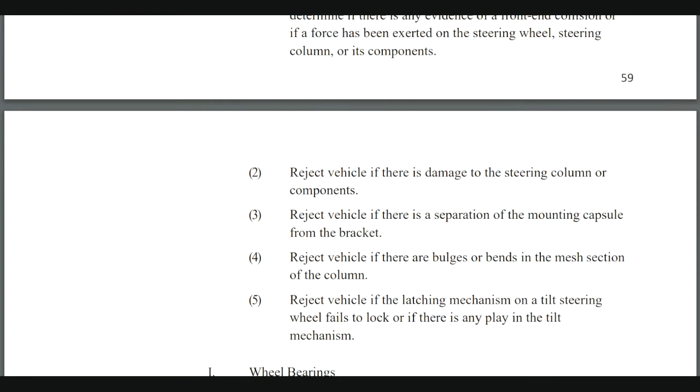H. Steering column. 1. Examine the energy-absorbing steering column carefully to determine if there is any evidence of a front-end collision, or if a force has been exerted on the steering wheel, steering column, or its components. 2. Reject vehicle if there is any damage to the steering column or components. 3. Reject vehicle if there is a separation of the mounting capsule from the bracket.

4. Reject vehicle if there are bulges or bends in the mesh section of the column. 5. Reject vehicle if the latching mechanism on a tilt steering wheel fails to lock or if there is any play in the tilt mechanism.

I. Wheel bearings. 1. Reject vehicle if the bearing play exceeds the manufacturer's specifications. 2. Reject vehicle if binding, roughness, or noise is evident during bearing rotation. 3. Reject vehicle if the bearing adjustment locking device is missing, not engaged, or not functioning.

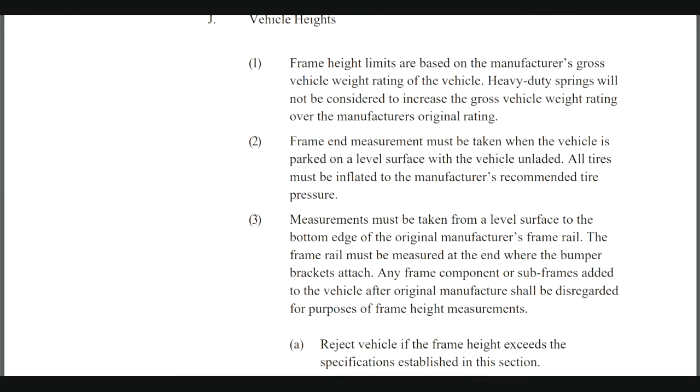J. Vehicle heights. 1. Frame height limits are based on the manufacturer's gross vehicle weight rating of the vehicle. Heavy-duty springs will not be considered to increase the gross vehicle weight rating over the manufacturer's original rating. 2. Frame end measurement must be taken when the vehicle is parked on a level surface with the vehicle unloaded.

All tires must be inflated to the manufacturer's recommended tire pressure. 3. Measurements must be taken from a level surface to the bottom edge of the original manufacturer's frame rail. The frame rail must be measured at the end where the bumper brackets attach. Any frame component or subframes added to the vehicle after original manufacture shall be disregarded for purposes of frame height measurements. A. Reject vehicle if the frame height exceeds the specifications established in this section.

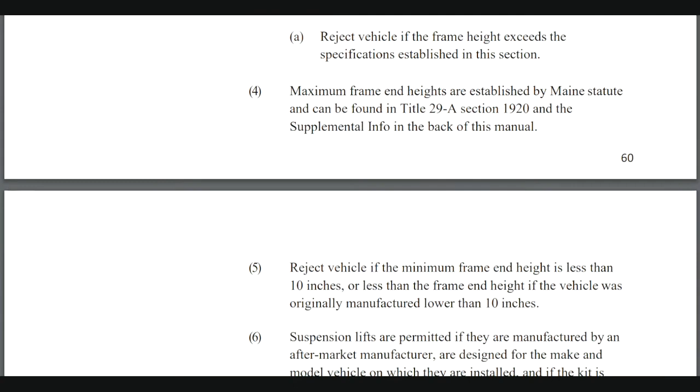4. Maximum frame end heights are established by Maine statute and can be found in Title 29-A, Section 1920, and the supplemental info in the back of this manual. 5. Reject vehicle if the minimum frame end height is less than 10 inches, or less than the frame end height if the vehicle was originally manufactured lower than 10 inches.

6. Suspension lifts are permitted if they are manufactured by an aftermarket manufacturer, are designed to the make and model of the vehicle on which they are installed, and if the kit is installed according to the manufacturer's recommendations. The entire kit must be used.

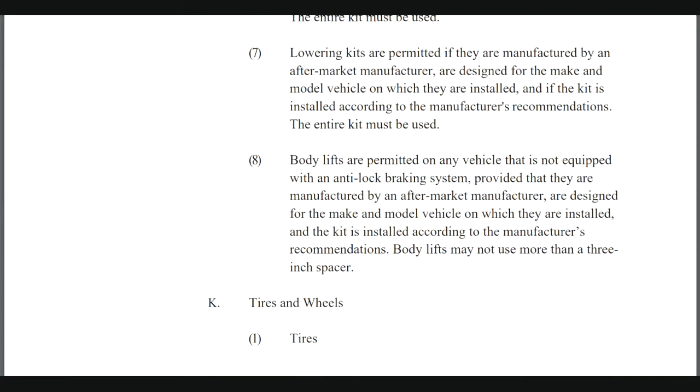7. Lowering kits are permitted if they are manufactured by an aftermarket manufacturer, are designed for the make and model of the vehicle on which they are installed, and if the kit is installed according to the manufacturer's recommendations. The entire kit must be used.

8. Body lifts are permitted on any vehicle that is not equipped with an anti-lock braking system, provided that they are manufactured by an aftermarket manufacturer and are designed for the make and model of vehicle on which they are installed, and the kit is installed according to the manufacturer's recommendations. Body lifts may not use more than 3-inch spacers.

K. Tires and wheels. 1. Tires. A. Tire tread depth shall be measured with a tread depth gauge calibrated in 1/32 of an inch. Readings shall be taken in accordance with Maine law. B. Reject vehicle if any tire is worn to the point where less than 2/32 tread design remains at all points where readings are obtained, or where any part of the ply or cord is exposed.

C. Reject vehicle if any tire has any bump, bulge, or knot, or a shifted or broken belt. Do not reject if a tire has a slight bulge in the sidewall that is the result of the manufacturing process.

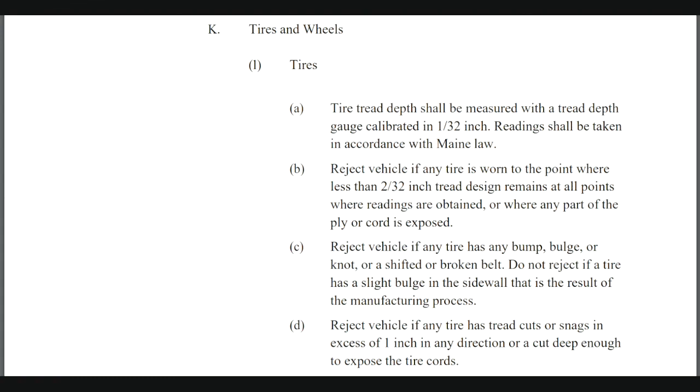D. Reject vehicle if any tire has tread cuts or snags in excess of 1 inch in any direction, or a cut deep enough to expose the tire cords. E. Reject vehicle if any tire sidewall has been repaired or is damaged to the extent that the body cords are damaged.

F. Reject vehicle if on the same axle there is a mismatch in nominal size, construction, or profile between tires. G. Reject vehicle if it is equipped with studded tires in violation of law. H. Reject vehicle if it is a front-wheel drive with studded tires only on the front.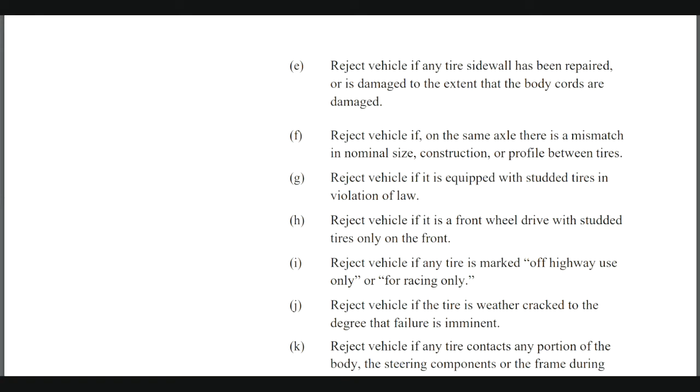Reject vehicle if any tire is marked off-highway use or for racing only. Reject vehicle if the tire is weather-cracked to the degree that failure is imminent. Reject vehicle if any tire contacts any portion of the body, the steering components, or frame during normal vehicle operation. Reject vehicle if radial and bias ply tires are mixed on a vehicle.

Reject vehicle if the load rating of any tire does not meet or exceed the tire load rating specifications or recommendations of the vehicle manufacturer. Reject vehicle if the fenders do not cover the tire tread.

Note: inspecting technicians must use their education, training, and experience to determine if a tire is weather-cracked to the degree that failure is imminent. The age of the tire, along with the degree of weather cracking, should be considered. Age of a tire can be determined by the DOT date code on the sidewall of the tire.

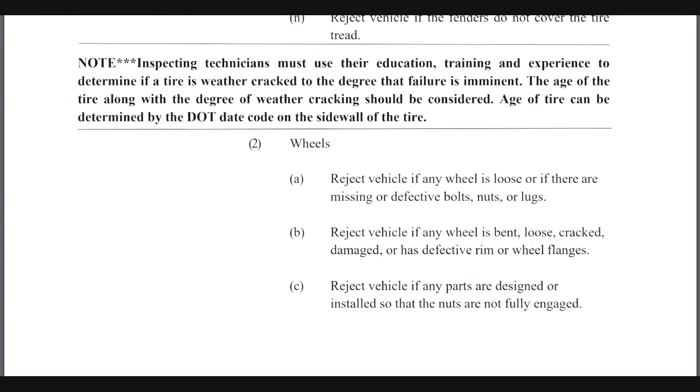Wheels. Reject vehicle if any wheel is loose or if there are missing or defective bolts, nuts, or lugs. Reject vehicle if any wheel is bent, loose, cracked, damaged, or has defective rim or wheel flanges. Reject vehicle if any parts are designed or installed so that nuts are not fully engaged.

Custom vehicles and street rods. General: All parts of all vehicles must comply with all laws and rules pertaining to motor vehicle inspections, other than exemptions noted in this section. Inspection technicians must examine custom vehicles and street rods for quality of workmanship.

Integrity of the vehicle components, and the vehicle geometry. If the inspection technician believes, based upon training and experience, that the strength or safety of any component of a street rod or custom vehicle is insufficient, they must not issue an inspection sticker.

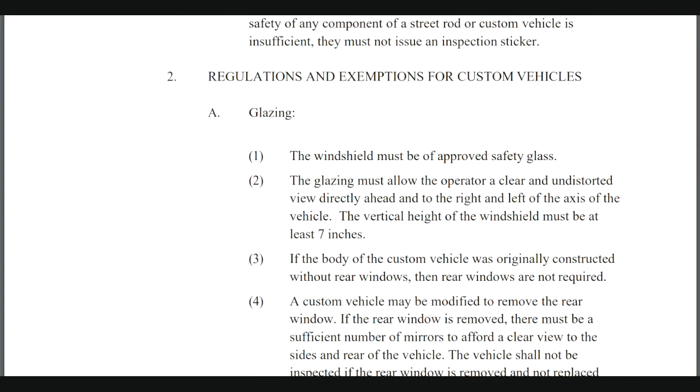Regulations and exemptions for custom vehicles. Glazing: The windshield must be of approved safety glass. The glazing must allow the operator a clear and undistorted view directly ahead and to the right and left of the axis of the vehicle. The vertical height of the windshield must be at least 7 inches.

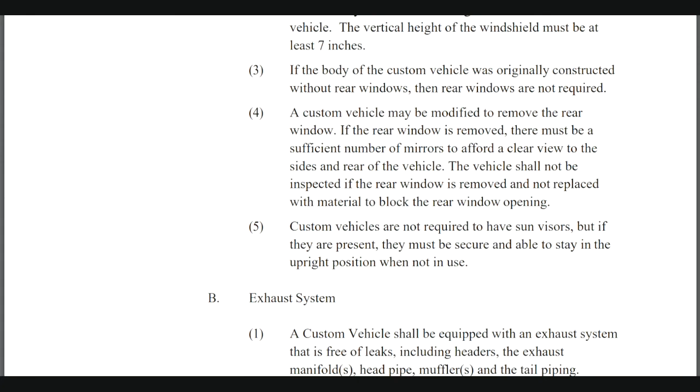If the body of the custom vehicle was originally constructed without rear windows, then rear windows are not required. A custom vehicle may be modified to remove the rear window. If the rear window is removed, there must be a sufficient number of mirrors to afford a clear view to the sides and rear of the vehicle.

The vehicle shall not be inspected if the rear window is removed and not replaced with material to block the rear window opening. Custom vehicles are not required to have sun visors, but if they are present, they must be secure and able to stay in the upright position when not in use.

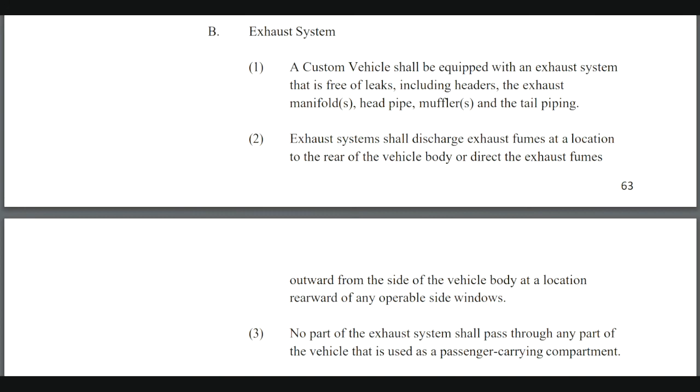Exhaust system: A custom vehicle shall be equipped with an exhaust system that is free of leaks, including headers, exhaust manifolds, head pipes, mufflers, and the tailpiping. Exhaust systems shall discharge exhaust fumes at a location to the rear of the vehicle body or direct the exhaust fumes outward from the side of the vehicle body at a location rearward of any operable side windows.

No part of the exhaust system shall pass through any part of the vehicle that is used as a passenger carrying compartment.

Body and structure. Bumpers: Custom vehicles are exempt from bumper requirements. If a custom vehicle is equipped with a bumper, it must be securely attached and so constructed that it does not pose a safety hazard to occupants, pedestrians, cyclists, or other vehicles.

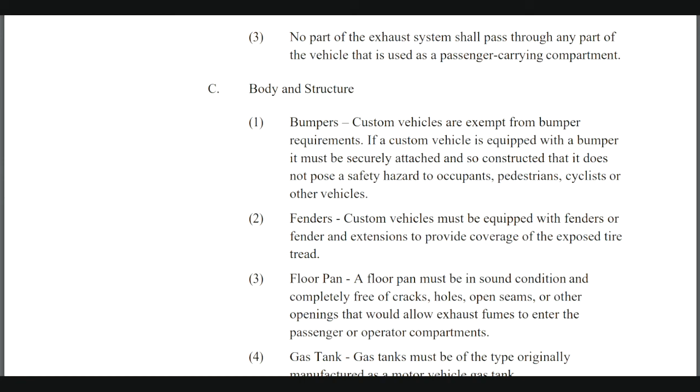Fenders: Custom vehicles must be equipped with fenders or fender and extensions to provide coverage of exposed tire tread. Floor pan: A floor pan must be in sound condition and completely free of cracks, holes, open seams, or other openings that would allow exhaust fumes to enter the passenger or operator compartments.

Gas tank: Gas tanks must be of the type originally manufactured as a motor vehicle gas tank. Rear engine driven vehicles must have a metal or fiberglass shrouds covering exposed exhaust pipes and drive belts.

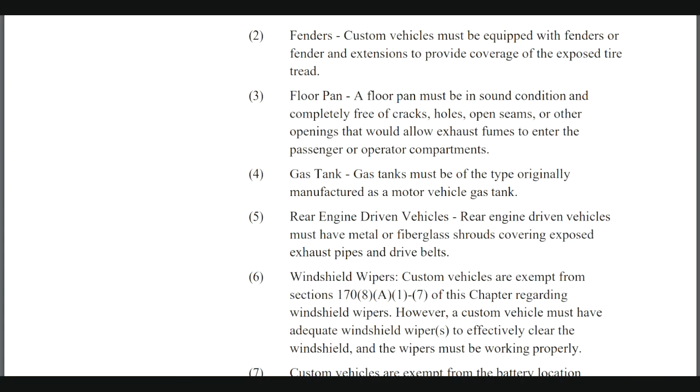Windshield wipers: custom vehicles are exempt from sections 170(8)(A)(1)-(7) of this chapter regarding windshield wipers. However, a custom vehicle must have adequate windshield wipers to effectively clear the windshield, and the wipers must be working properly. Custom vehicles are exempt from the battery location requirement under section 175A, provided that the battery is properly secured and adequately vented.

Tires and suspensions. Custom vehicles are exempt from the portions of this chapter regarding tires, except that no tire may contact any portion of the body, the steering components, or the frame during normal vehicle operations. All tires must be DOT approved and must fit entirely within the body or fenders of the vehicle so that no portion of the tire tread is exposed. Tires must meet the requirements in Title 29-A, Section 1917. See the supplement.

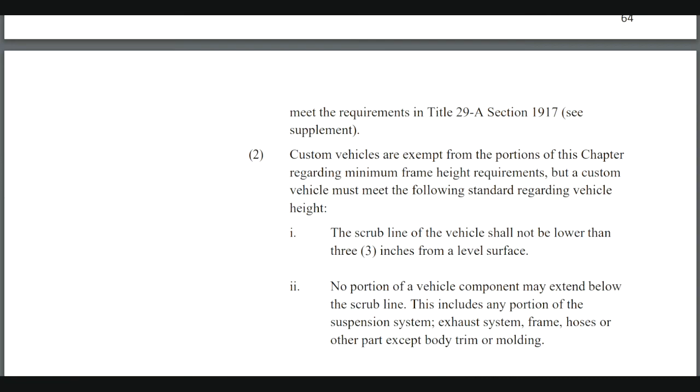Custom vehicles are exempt from the portions of this chapter regarding minimum frame height requirements, but a custom vehicle must meet the following standard regarding vehicle height: the scrub line of the vehicle shall not be lower than 3 inches from a level surface. No portion of a vehicle component may extend below the scrub line. This includes any portion of the suspension system, exhaust system, frame, hoses, or any other part except body trim or molding.

For purposes of measurement, the scrub line must be measured with the vehicle on a flat surface, with the full weight resting on the tires. The scrub line may be measured using any 2 tires.

Regulations and exemptions for street rods: a street rod engine must be front-mounted unless the vehicle was originally manufactured with a rear engine.

Glazing. The windshield must be of approved safety glass. The glazing must allow the operator a clear and undistorted view directly ahead and to the right and left of the axis of the vehicle. The vertical height of the windshield must be at least 7 inches. If the body of the street rod was originally constructed without rear windows, then rear windows are not required.

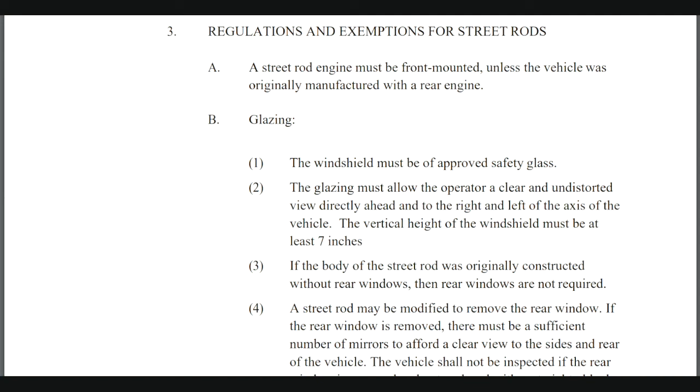A street rod may be modified to remove the rear window. If the rear window is removed, there must be a sufficient number of mirrors to allow a clear view to the sides and rear of the vehicle. The vehicle shall not be inspected if the rear window is removed and not replaced with a material to block the rear window opening.

Street rods are not required to have sun visors, but if they are present, they must be able to be secure and stay in the upright position when not in use.

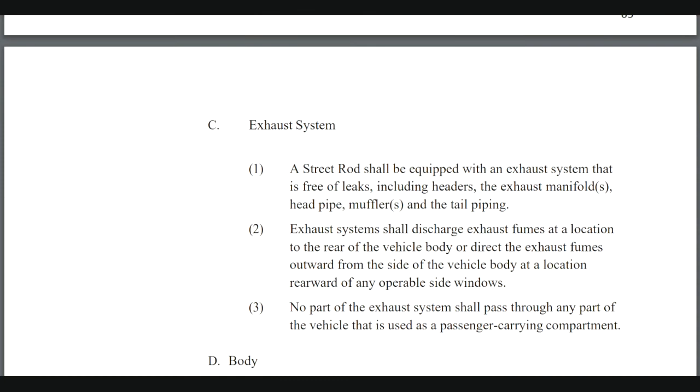Exhaust system. A street rod shall be equipped with an exhaust system that is free of leaks, including headers, exhaust manifolds, head pipe, mufflers, and tail piping. Exhaust systems shall discharge exhaust fumes at a location to the rear of the vehicle body or direct the exhaust fumes outward from the side of the vehicle body at a location rearward of any operable side windows. No part of the exhaust system shall pass through any part of the vehicle that is used as a passenger carrying compartment.

Body. Bumpers: street rods are exempt from the requirement to have bumpers. Fenders: street rods are exempt from the requirement to have fenders. Floor pan: street rods must have a floor pan that is solid and completely free of cracks, holes, open seams, or other openings that would allow exhaust fumes to enter the passenger compartment. Gas tank: gas tanks must be of the type originally manufactured as a motor vehicle gas tank.

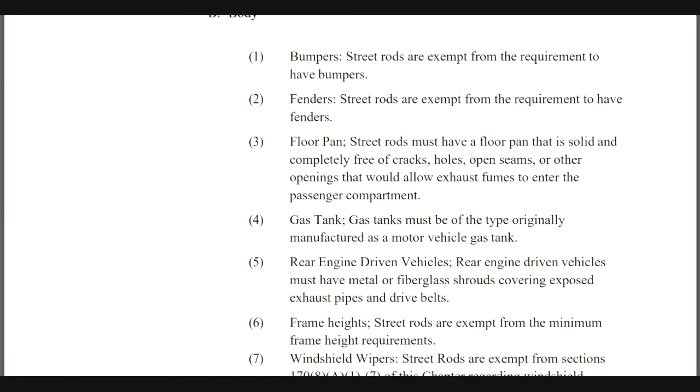Rear engine driven vehicles must have metal or fiberglass shrouds covering exposed exhaust pipes and drive belts. Frame heights: street rods are exempt from the minimum frame height requirements. Windshield wipers: street rods are exempt from sections 170, 8A, 1 through 7 of this chapter regarding windshield wipers. However, a street rod must have adequate windshield wipers to effectively clear the windshield, and the wipers must be working properly. Hoods: street rods are exempt from having hoods.

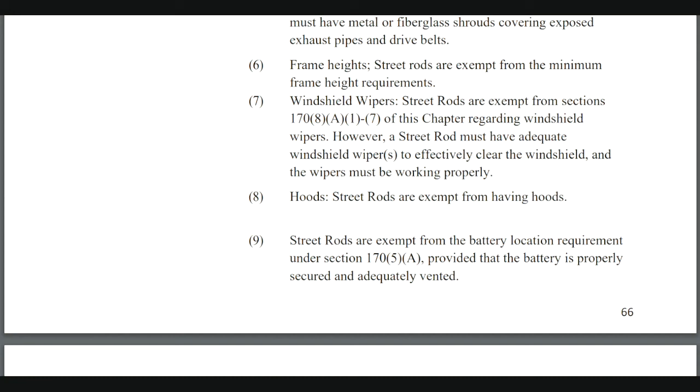Street rods are exempt from the battery location requirement under section 170(5)(A), provided that the battery is securely attached and vented. Tires: street rods are exempt from the portions of this chapter regarding tires, except that no tire may contact any portion of the body and steering components or the frame during normal vehicle operations. All tires must be DOT approved. Tires must meet the requirements in Title 29A, Section 1917. See the supplement.

That's it for this section. I know it was a long one.